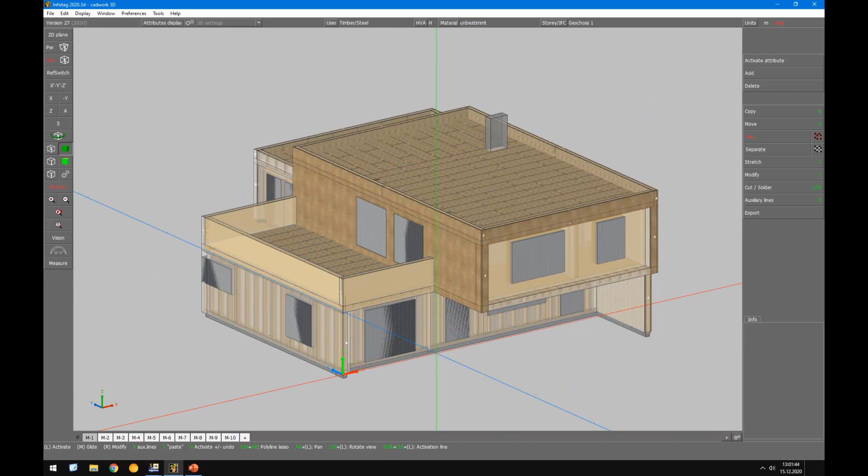We start directly, in this case, in CADWork, and we see the model there. Let's have a look underneath the rendering and we will see how it was solved. You can see here the CLT slab, and here on the left side, of this problem.

Okay, I got some issue with my monitor.

So we have beams and a dowel type connection. We get one component here in the vertical direction via this column, and one component goes in the upper chord to the next tension beam and downwards. So I'm interested only in

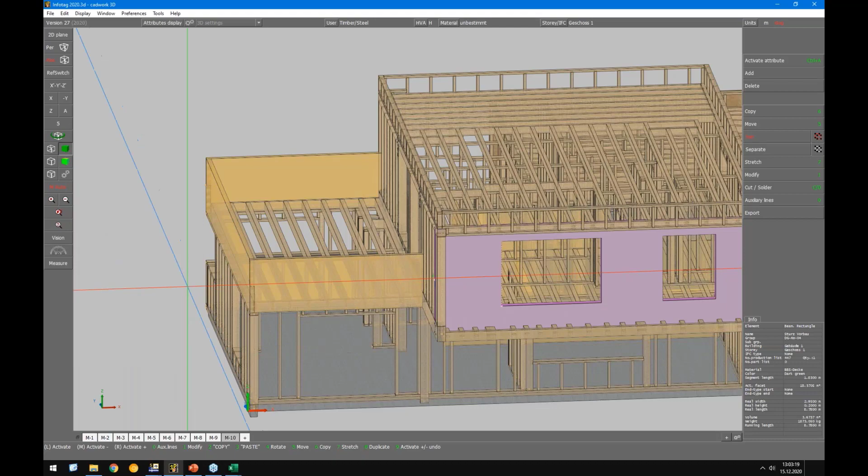I have some issues with my monitor. Wait a minute, please. Andreas, could you confirm, please, if you still see my screen? I can see your CADWork screen. Yeah, okay, perfect. I switched over to the second monitor. There was an issue. Okay, let's see if it works fine. I'm sorry.

The aim now is RFEM, and we can get there by exporting, for example, an IFC file or a DXF file. But there's one smarter solution. In this case, I will look only at this element here, and I'm interested in the center lines, because this is a solid element, and of course I want to design it with a surface element and not with a solid element. So therefore we need the center lines.

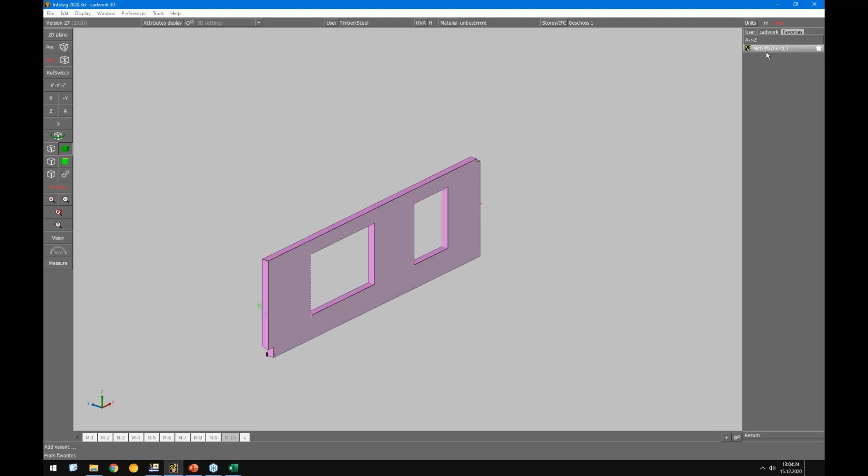Here I can use a variant from CADWork. I was not able to rename it, but it's called center surface for CLT. So I use it and select the element. Then let's go to the wireframe mode, and you can see here the center line or the center surface. This is the one and only element I'm interested in.

So I have the possibility now to export it as a file. In this case, I use the ACIS export format. No, wait a minute, I need to, of course, select all of them. All right, I save it, export, and now I switch over to RFEM.

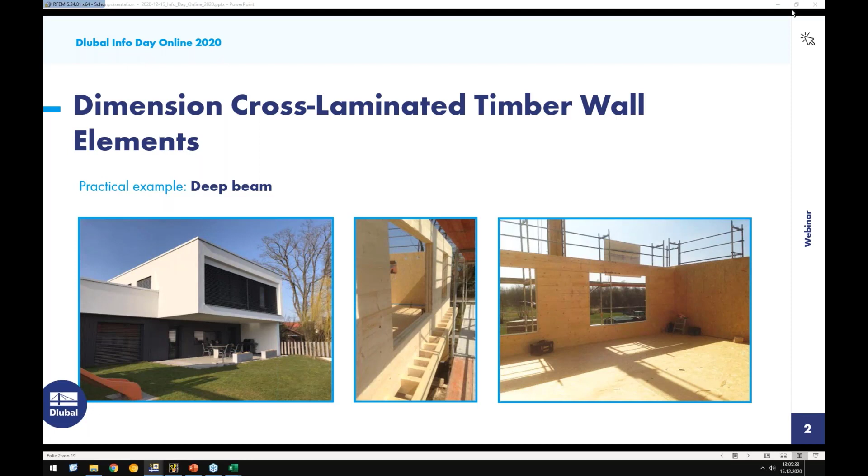Here I'm able to import this SAT file. I select Eurocode 0 plus for the SLS combinations, 1990 plus 1995, and we leave the global Eurocode, but of course you're able to select any other national annexes. We want to create load combinations automatically. I select it and I click OK.

All right, then let's see what we have here. The wall was taken over from CADWork with the openings, and there is a material assigned. It's a softwood material, but it's not important for now. We will come to this later.

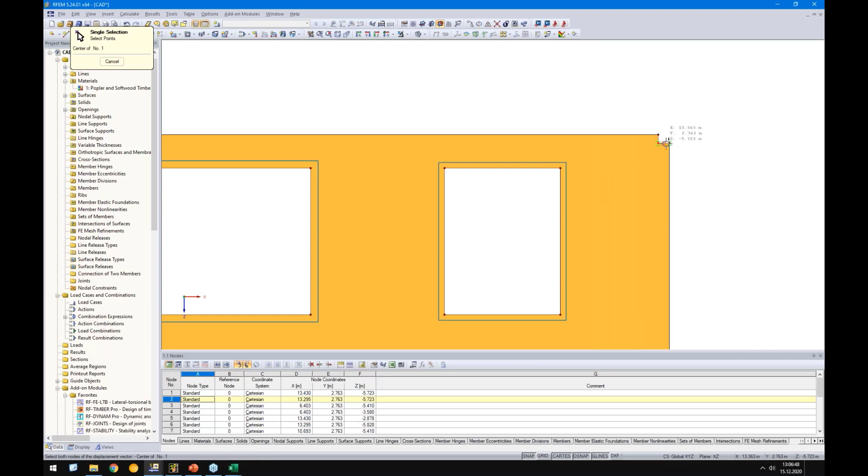We want to clean up the model a bit. For example, I want to ignore this notch here on the upper right side. I will move this node to get a sharp corner. Perfect. And I will do the same here.

We have this tiny step here, or this tiny jump. I want to neglect it, of course. So I grab the Z coordinate of this node and assign this coordinate to all other nodes. At the end, I will merge these nodes. And the same on the left side.

Right side, I mean. All right, so now we can start actually by adding the loads, supports, and so on. But before we do this, let's think about what needs to be checked and what is important. You see here the rendering of this surface, and it's clear when there should be a support, and on the right side should be a support, that the outer layers should be orientated in horizontal direction.

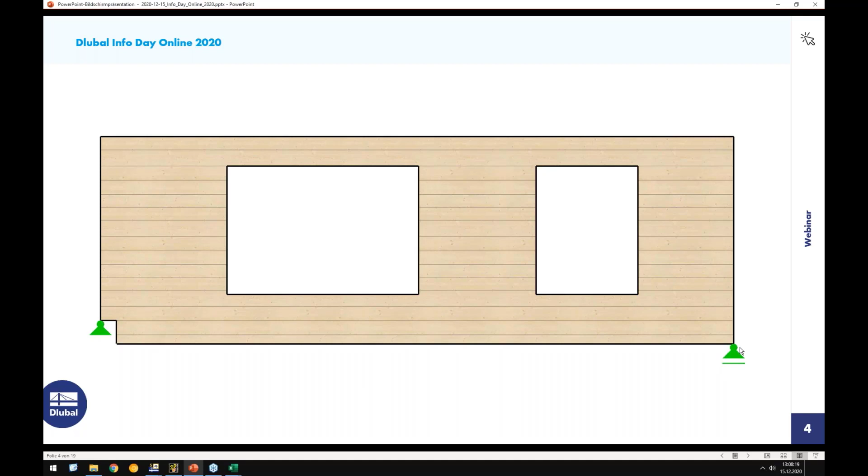That's one important thing, that we need to take care of the orthotropic direction. So the outer layers should be horizontal, and every second intermediate layer should be orientated vertical. Okay, so the next thing is, of course, we need to take care about the supports. In this case, just for demonstration reasons, it's a nodal support. We will not use it afterwards in our design, but for the slide, it is okay.

Okay, we need to take care of the FE mesh. So what size should be used or is suitable? We talk about the stiffness of this CLT element, especially when we check this section here. This one here is a section through the wall. We see here we have the horizontal layers, and we have the transversal layers, which are orientated 90 degrees to the horizontal layers.

And you see it here, this white area. This should be the space between this board and this board, because we do not use any glue at the narrow sides of the boards. So this, of course, has influence on the stiffness, and we need to consider this correctly. Okay, we have a tiny notch here on the bottom. Of course, it will not be controlling since this element is really high in ratio to this small notch.

But you can imagine when you have a CLT element as a beam, and maybe you extend this line here, then you have around 50% of the notch, and then it is much more controlling, and this needs to be checked. I'm just saying that you should consider it. Okay, because of the missing glue at the narrow sides, the shear cannot go directly from one board to the other board. It must go via torsion to the transversal layers, and from the transversal layers back to the horizontal layers. And this torsion, of course, needs to be checked too.

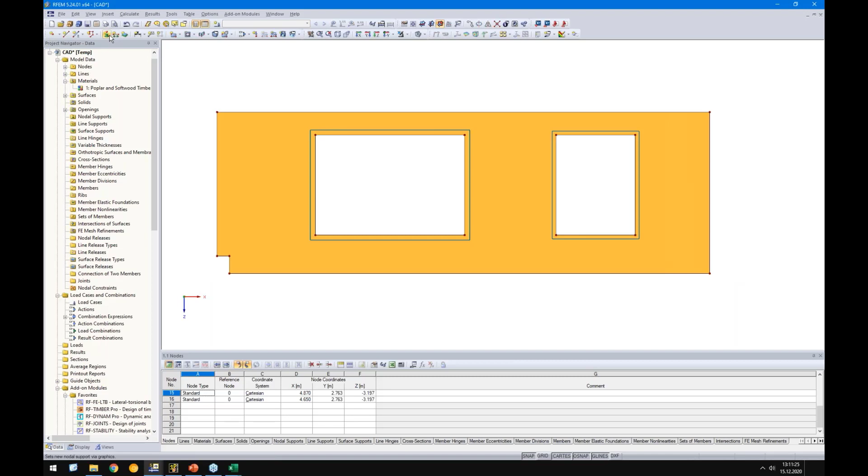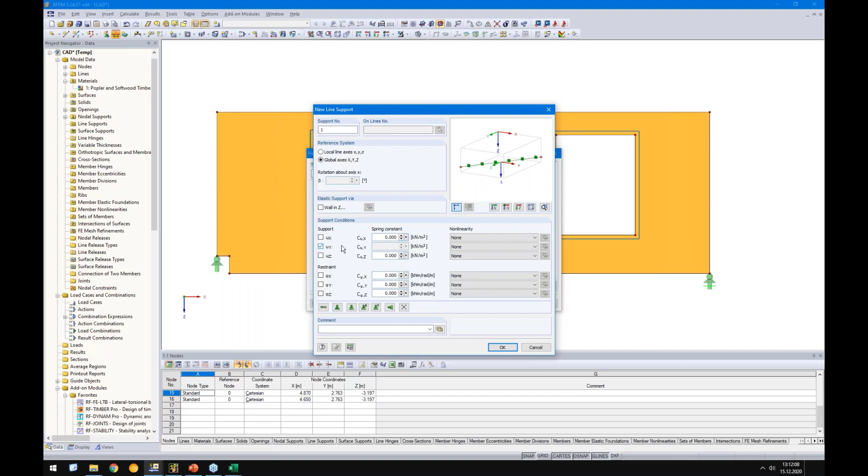So I will start really with nodal supports to see the effects. Okay, so I will support it on the left side. And of course, on the right side, I will use no degree of freedom in X direction. And of course, our wall is supported by the roof beams, the floor beams, and the walls. And in this case, I will directly add line supports. So I support it only in Y direction, means out of plane. So here, here, here, and here.

All right. So then we can start with loading. We create, first of all, load cases. Load case 1 should be self-weight, and we want to consider snow load, and of course, imposed load for the floor. You see here the load duration was assigned automatically, dependent on the action category. And now we start to fill the load cases with loads. For the roof, we have a line load of 5 kilonewton per meter. And for the floor, it is the same, 5 kilonewton per meter.

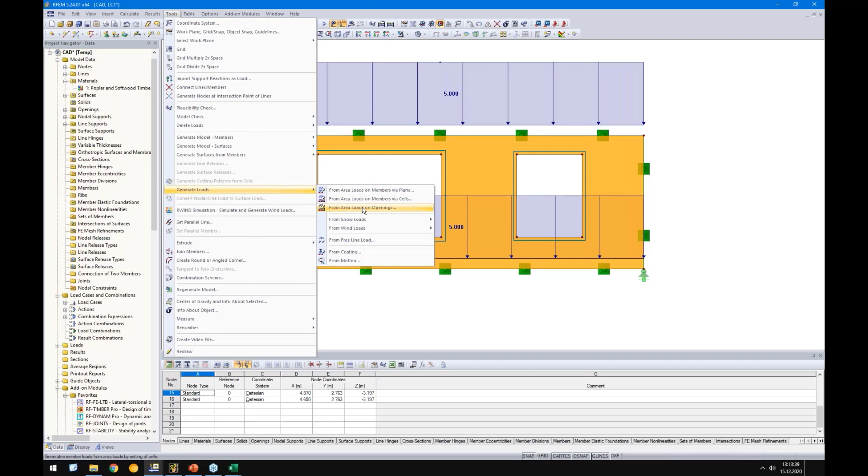Then for the windows, of course, the window has a self-weight as well, which needs to be considered. Which ways do we have to apply loads for openings? There is here under tools, generate loads from area loads on openings. There is an option, but as you can see here, it distributes the load also to all boundary lines. And this is maybe not the way I want to consider it now. I want to say that the whole window weight should act on this bottom line here. So I use a normal line load here.

So when you consider we have a density of 25,000 Newton per cubic meter, and the height of the window is 1.83, and let's say 3 layers with 5 millimeters is 0.015, that equals around 0.7 kilonewton per meter.

Okay, and at the end, we need, of course, to consider the weight for the self weight of all components which will be fixed to the CLT element. And in this case, it acts on the whole surface, of course. So I use a surface load in this case. It should act in Z direction, and the load magnitude can be set here.

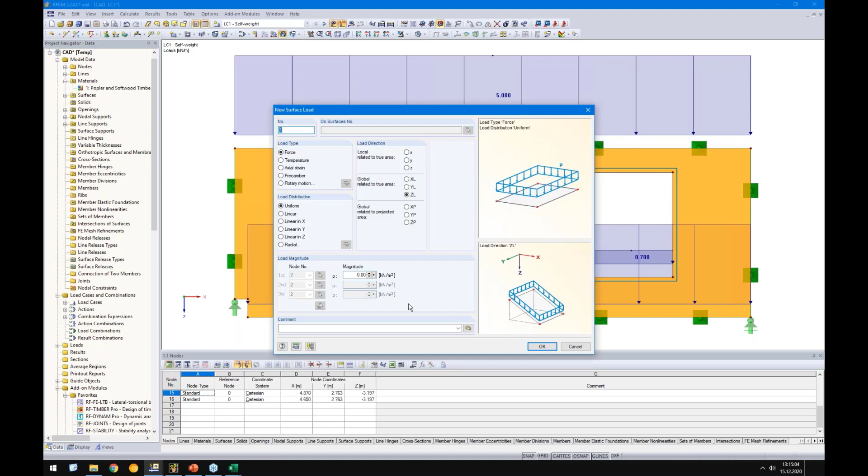In this case, of course, I can calculate it manually and enter the value here, but you can imagine if you do this really often, you waste a lot of time. So better to use here our multi-layer composition. Inside here, I have prepared a few compositions for the wall structure. So in this case, I use this setting here. Let's have a look inside.

So there is an exterior plaster on the outside, wood fiber insulation. Then I have added the CLT. It should become 200 millimeter, and the density is 0 in this case because I consider the self weight of the CLT directly in my load case 1. So it's not necessary to add any value here, or you need to enter a value.

0, I guess it's not allowed, but just enter a small value like 0.0001 to get it directly to the graphic here. Otherwise, you need to delete it, and then you don't have this proper drawing. All right, then let's overtake this value and click OK, and here we go.

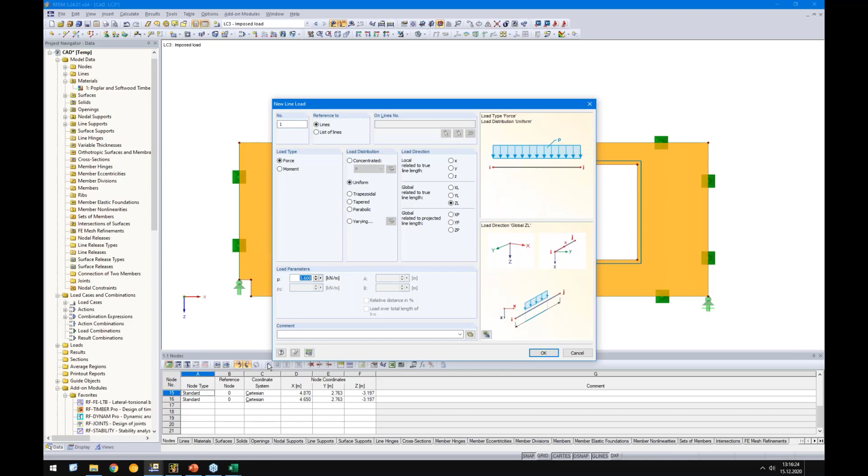So the next load case is snow load. So the snow load is 3.6 kilonewton per meter. And at the end, we have imposed load for the floor, and the floor beams are fixed on the bottom side of the bottom chord with 6.5 kilonewton per meter.

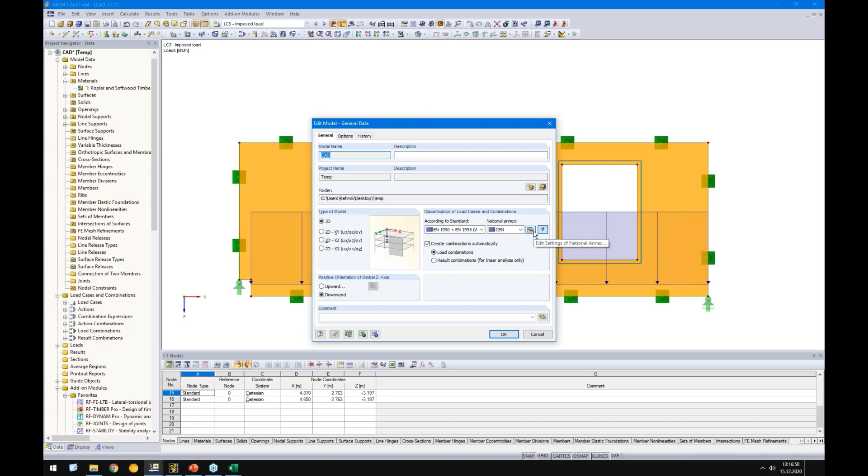All right, so far so good. We have finished loading, and we see directly the load combinations. Maybe you see here the 1.8. This considers the creeping effects. I forgot to switch this here, or to say you can switch the factor, the KDEF factor here at the properties of the national annex, and here on the bottom side you can switch, for example, to 0.6. So when you check it, you see the factor is considered in the load combinations for the quasi-permanent loading.

All right, so then actually we can start with the analysis, and before we do this, let's check our FE mesh. So I just create the FE mesh and see what is the result. And as you can see, okay, the FE mesh is absolutely bad and needs to be optimized. So you see here it's the default setting of 0.5 meters, what we use in the background. But what FE mesh size should I use in this case?

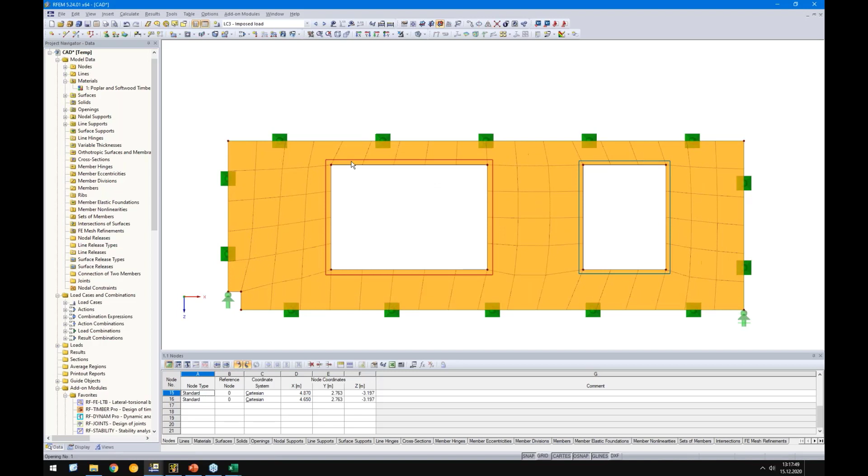So the weakest area is here, the upper chord, and I would say you should have at least 3 to 4 elements over the height here of the upper chord. And with the background that the producer does not put any glue on the narrow sides, and even if they put glue on the narrow sides, I do not recommend it as a rigid connection because of humidity effects and so on. So because of this, and we check this distortion design, what I mentioned in the presentation, the FE mesh size should be the same width as the board width.

So when you think about the ratio board width to board height around 4 to 1 or 3 to 1, then with the board thickness of 40 millimeters, what is used in this example, and use 3 to 1, we get 120 millimeter board width. So I will use here, let's start with 0.1 meters and regenerate FE mesh, and we will see, okay, we got 4 elements, we have these small triangle elements here and here. Yeah, for membrane forces, that's fine, but for bending, they could deliver some bad results.

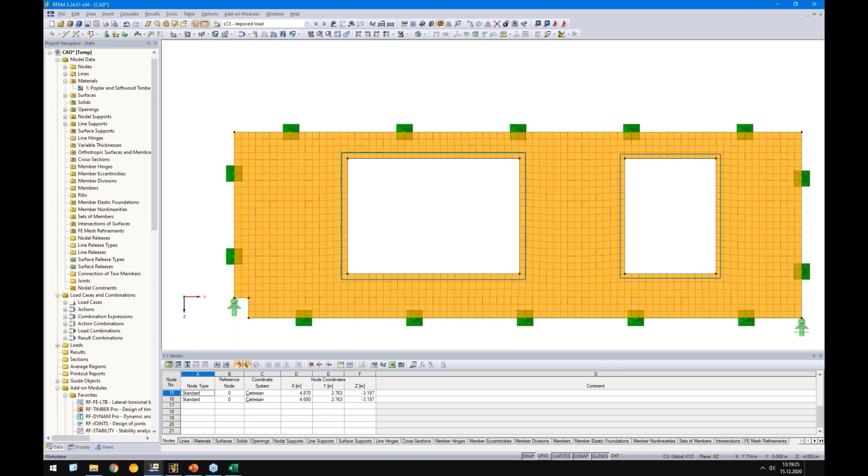So maybe I will increase it a bit and see what's going on here. Yeah, 0.11. Yeah, looks good so far. So we use this FE mesh size for the analysis. Okay, then just try to run the analysis, and then you will see we get an error message because of Poisson ratio. And yeah, when we see this, this is just a poplar softwood timber with an isotropic linear material model.

Of course, we can change it here to isotropic elastic 2D, but in this case, that's something special with CLT, because for CLT, we have our add-on module called RF-LAMINATE. Okay, and inside the RF-LAMINATE, we define the composition. And after we define the composition, before we run the analysis, the stiffness gets exported to RFEM, and then the internal forces are calculated based on the stiffness that we exported. Okay, I want to design surface number 1 according to Eurocode for CO1 through CO5.

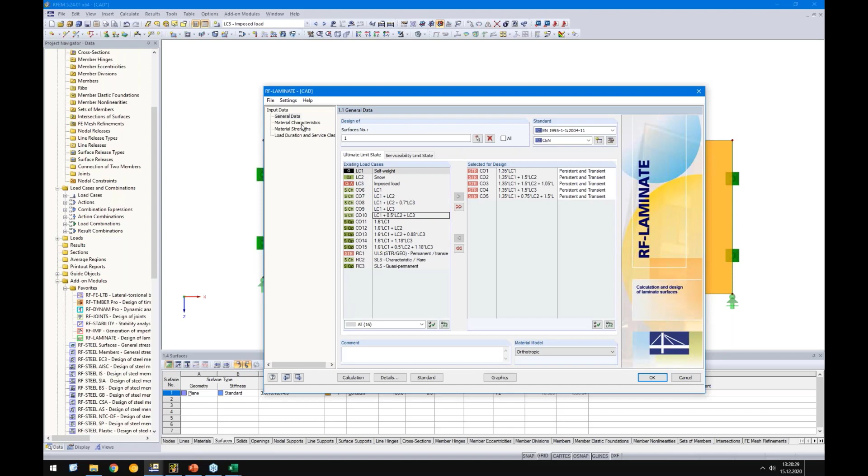So material characteristic, here we go with defining the composition. So we have to select the surface, it's surface 1, and here we can, for example, import compositions from different producers. Yeah, that's one way, and the common way actually, to not favor any producer, I created it manually. In this case, this is what you can do too. So I'll load the material from our material library.

So it's softwood, and I choose a C24 in this case, and you see here all settings are filled. And in this case, I select here cross-laminated timber. And let's see what's going on here. We have the thickness, 40 millimeter is fine in this example. The values for EX and EY are loaded, and for shear modulus and so on. Here for the second layer, I hit the F8 button. It overtakes the entry from the first column.

Okay, so in this case, the orthotropic direction is 0. So you see here this coordinate system. The red arrow is the x-axis, and the green one is the y-axis. So if I rotate the second layer, for example, you will see the red arrow goes downwards, and this is the transversal layers, so the second one. Okay, and the same for the fourth layer. Okay, then let's go to the next tab.

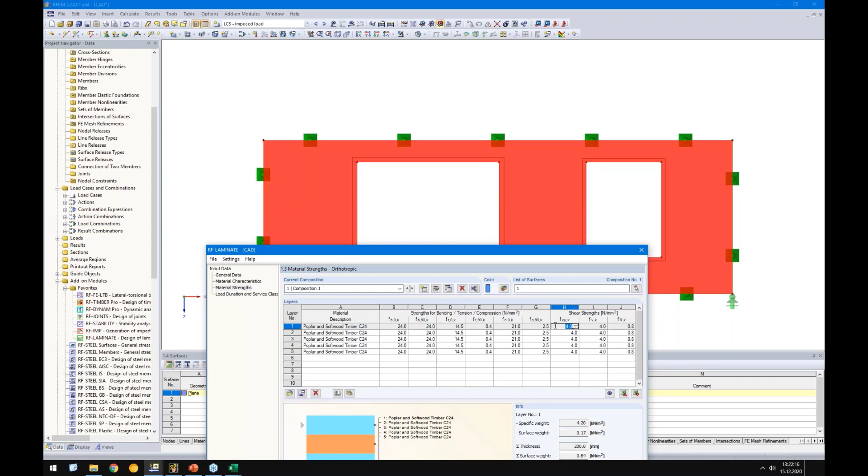It's the material strengths. And here we simply modify the shear strength a bit because we do not consider any k-crack for surface design, and therefore I will modify it a bit and set it for all layers. Okay, the last tab is about the load duration class, but it was assigned automatically to the load cases, and therefore we always use the shortest load duration as the code offers. Here are a few settings about the service class, but this is fine for us.

Okay, let's go back to the composition, and let's check the stiffness matrix. So we have the stiffness matrix elements for bending, for shear, and for membrane. And in this case, I do not consider any wind, since the wind was really weak in this example, and it is not controlling. It's much easier in this case to consider and envelope the results. So therefore, in our case, only the stiffness matrix elements for membrane, meaning D66 through D88, are necessary.

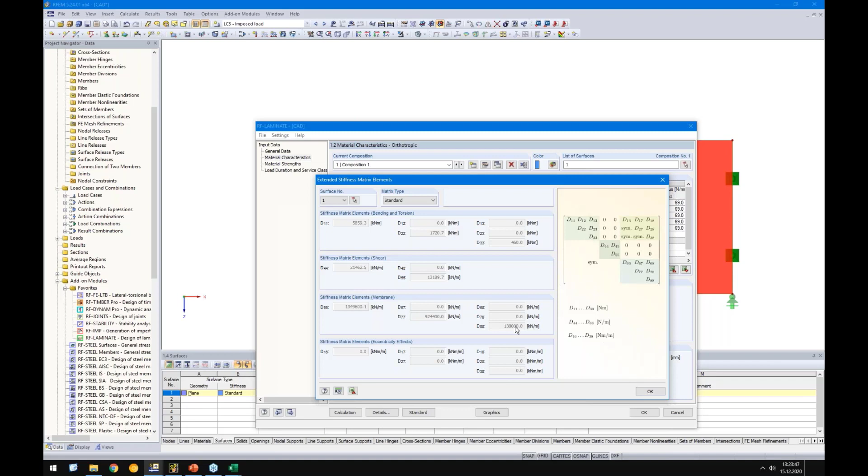Okay, but the only problem we have now, we did not load it from the producer library. Therefore, we have a bit too much shear stiffness inside the plane, because how should the program know about the glue on the narrow sides? And this is what I want to show you about this issue. Okay.

All right, so here I have prepared a small example, and these are solid elements. In the upper one, I have glue on the narrow side, so it means there is a rigid connection between the solids. And on the bottom side, you see I have modeled a small gap in between each board from this direction, and also in the other direction here on the upper side.

And here you see the results. So this is the result from the solid, and this is the result from the surface and RF-LAMINATE. You see the result is the same. And of course, if there is no glue on the narrow sides, the deformation gets bigger, and this effect needs to be considered also here in RF-LAMINATE. What you need to do is consider the ratio from this solid element to this solid element. And then you get a factor and you know how to reduce the stiffness.

Of course, this is really time consuming, and nobody wants to do this. Fortunately, there is an approach already, and it's based on the Austrian National Annex. So here you see this Excel sheet. You can download it afterwards on our homepage. You see here a small table, and you need to enter just the thickness of the slab, the amount of layers and the board width, and you get a reduction factor of 0.59.

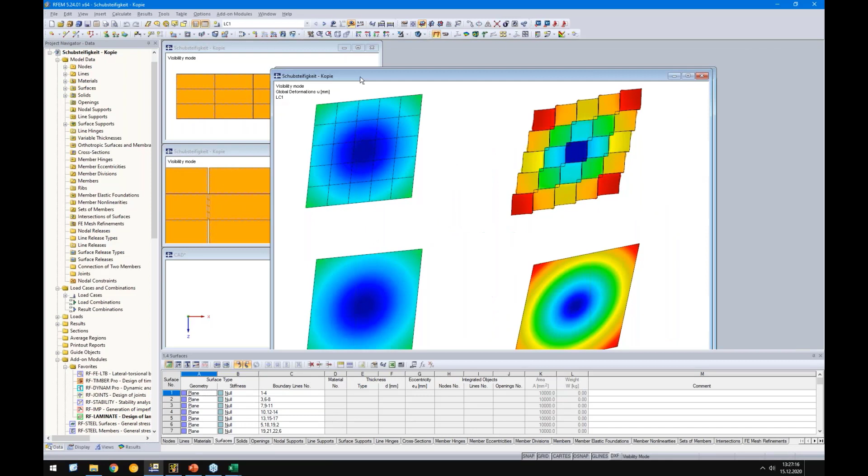And when you enter this value here in the details of the composition, as you can see here, you get exactly the same deformation as the solid elements have. So this needs to be done in case the producer does not provide us any values, but normally they do, and therefore you don't have to waste time on this. All right, so let's go back.

And for our example, we need to figure out these factors. So I'll open the Excel sheet. In this case, we had 200 millimeters, 5 layers, and 120 millimeter board width. So we have a reduction factor for the torsional stiffness of 0.5, and for the in-plane shear stiffness of 0.6. And these values we take over now. So it's 0.5 and 0.6.

I use it also for the torsional element, since we do an eigenvalue analysis afterwards, and there the torsional stiffness is important too. Okay, here I say I have no glue at the narrow sides. You see there is an E modulus in Y direction considered. We will check what happens afterwards, and we have 120 millimeter board width. That's because of this torsion design.

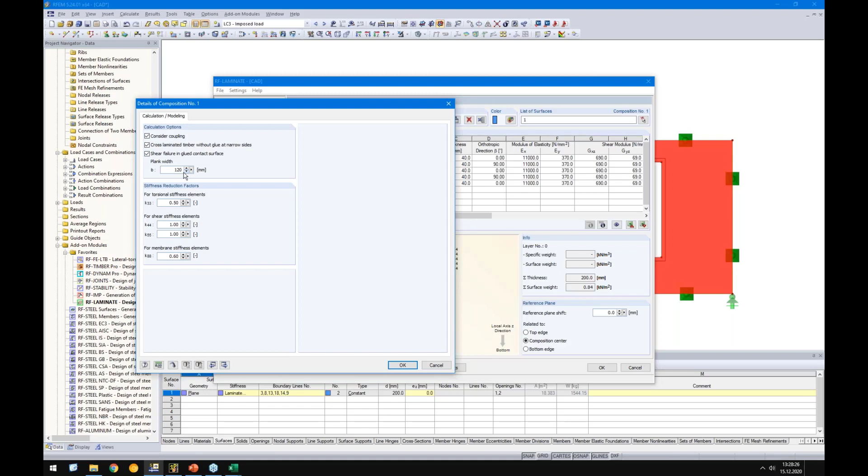As you can see here now, the E modulus in Y direction of each layer, so not of the whole composition, only of each layer, is set to 0. All right, and then let's start the analysis. Okay, so this is the result. The first time really confusing, but let's see what we can do.

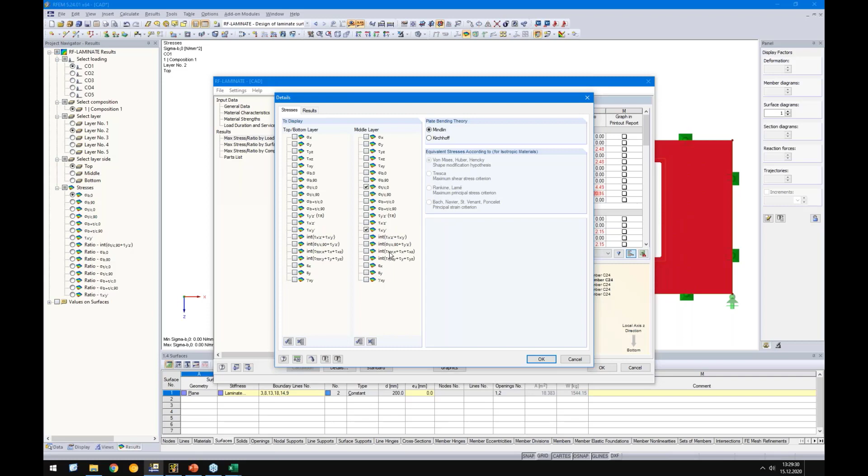So in this example, in this tab here, you can select which designs you want to see. In this case, we have only membrane forces, so the stresses are constant over the thickness, and therefore I'm interested only in the results from the middle layers. And of course, I'm only interested in our normal stress and in our in-plane shear stress. That's XY, referring to the local axis system. Afterwards we activate the torsion design, but for now it should be fine.

Okay, then we come to a ratio of 5 point something. Okay, let's see where it happens. You see this black arrow here. Of course, it's exactly at the location where the singularity is, and where the nodal support is. Everyone who dealt already with FEM knows that's a typical singularity, and we cannot evaluate these results.

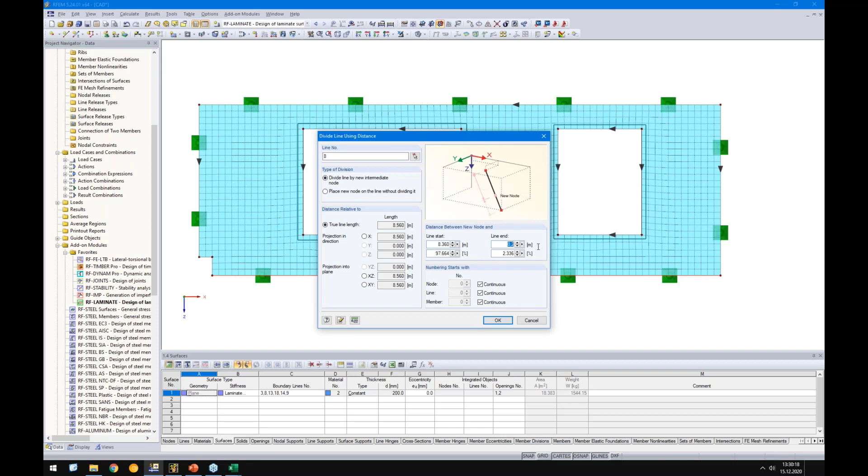Okay, so what can we do in this case? Of course, we can do the same as we do for loads. We distribute it to line loads or area loads. So in this case, I will distribute it to a line load. No, wait a minute, it was the start. Support width is here 20 centimeters.

Okay, so let's start here with the line support, and of course we should release it in X direction, and I create only one support, and it should be, of course, supported in X direction. Therefore, I enter a tiny spring here in X direction. Otherwise, the structure would move to infinity. All right, then let's go back to RF-LAMINATE again and check what happens.

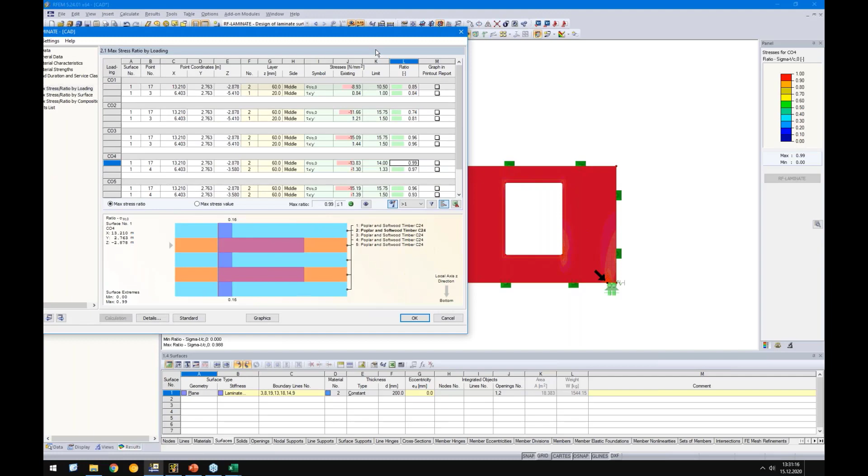So we had a ratio of 5 point something, and because of the line supports, we came down to 0.99. When we check the maximum ratio again, it comes from CO4. I will remove all other COs for future analysis, because CO4 in this case is design-governing, and I will check only CO4. It saves me a bit of time. Okay, so we have 0.99, and when we check it, it's not in the corner, but it's here.

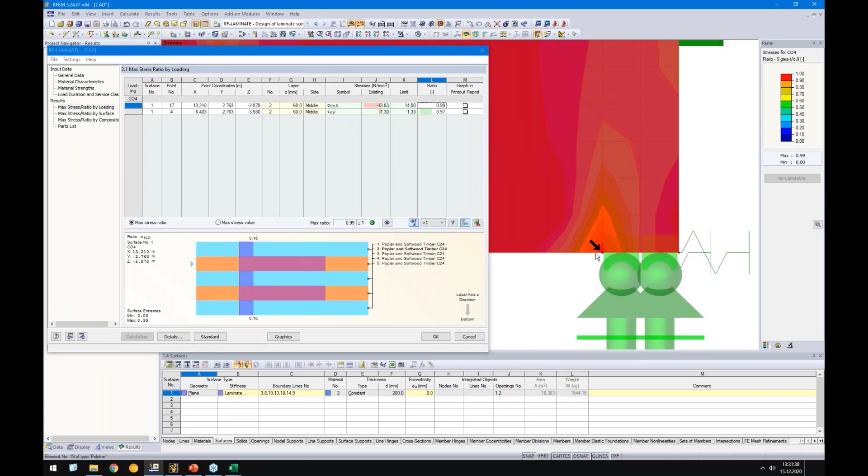So we have no stiffness here on this line, but then we have a really stiff or rigid support, and of course we get another singularity here. In case we use this approach, we have to consider our support reactions. So I will check our support reactions, and we can see here, maybe we need to refine the mesh a bit, but you can see also tension forces are covered by the support. Of course, this should not happen in our example or in general in timber.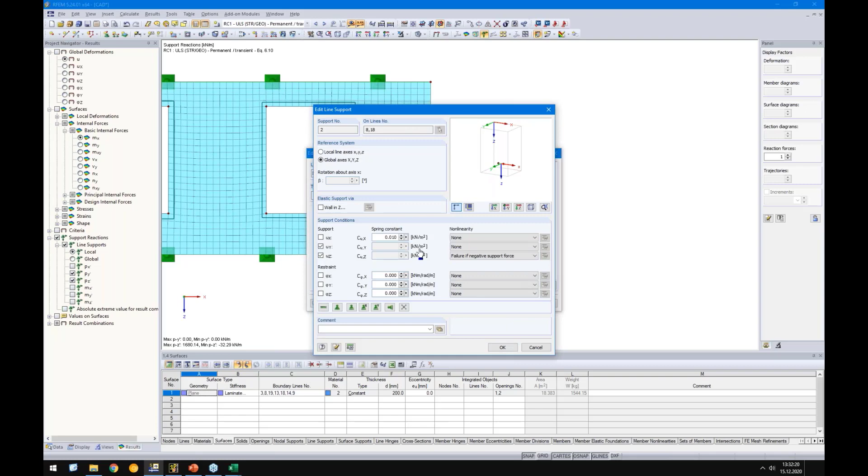Therefore, I add here a nonlinearity, which says, please fail if there is a negative support force. So in case of tension, the support should fail. Okay, then let's check it again, just to avoid any restraint here in this corner. Okay, then we are fine, perfect. Okay, let's go back to CADWork and see.

Let's see here. The support condition here on the left side is still considered as a rigid support. Maybe that's true here for the right side, but of course not for this side. How can we represent this support in our 2D analysis?

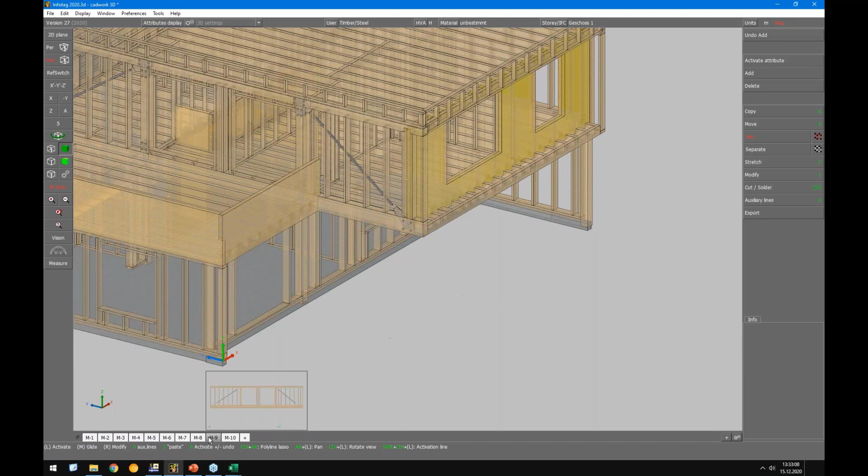I have prepared a scene in CADWork, so these are my elements of interest. In this case, I can simply say, please export a model structural system. This is what I want to do. Okay, there's something about the connection. I want to save it, let's say, on the desktop. I want to save this submodel DSTV file on my desktop.

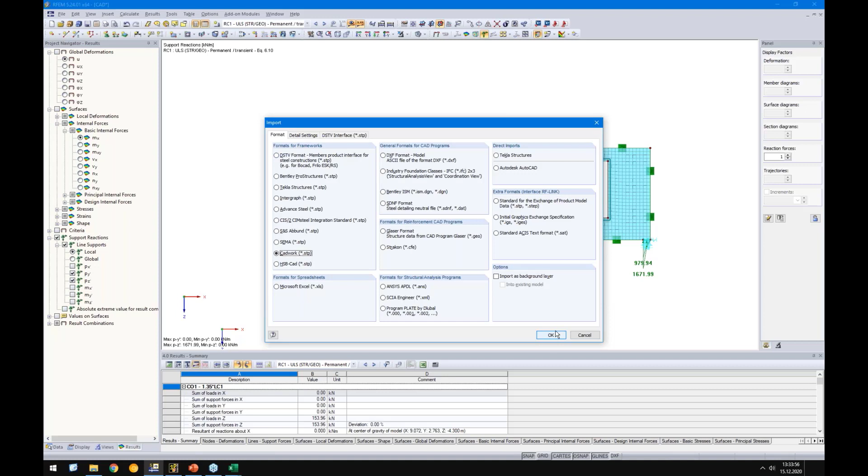And now I can import it here on the left side, CADWork STP file. It's an STP file based on this interface for steel constructions, but it works also for timber. Okay, so, oops, here we go. We don't need any load combinations, and we can simply import this file. Okay, looks good so far.

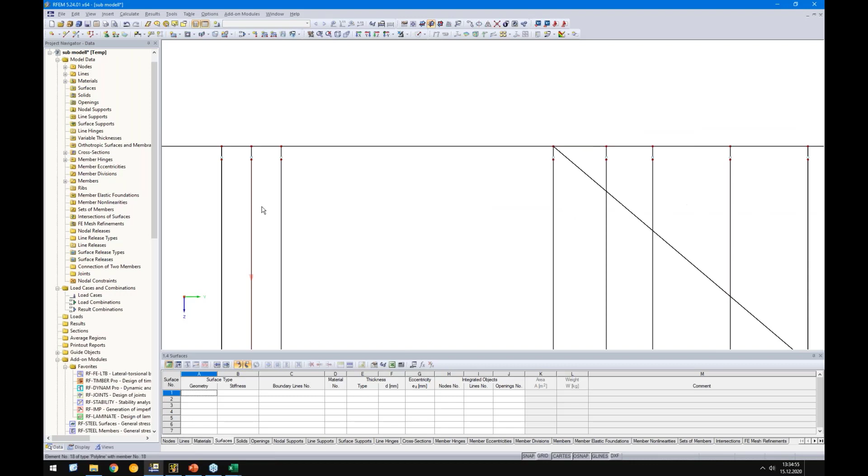So we have the member elements included in RFEM, and let's see the wireframe model. You see, there are still a few issues. We can fix it quickly here. You see here, members are not connected, or members are too long, and so on. That's because of the half width of this beam element. Okay, so this one we will fix via drag and drop directly, and the same on the right side, and here on the left side.

Okay, then we quickly support it. We need to support it in Y direction, otherwise the beam would rotate around its own axis. And there is another support underneath this column. So I will add another one, which is sliding in Y direction, here and here. And the top chord, of course, must be supported, otherwise it will fall down or the beam will rotate around its own axis.

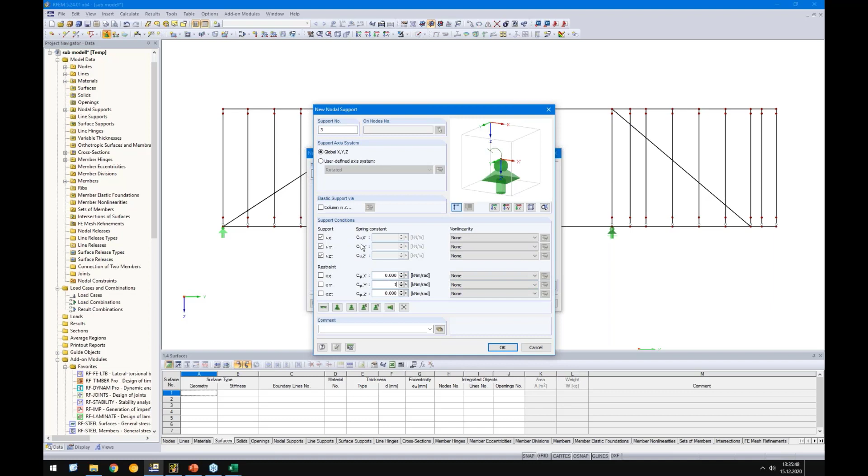Okay, so in this case, I need to restrain it around the Y-axis, for example, with a spring. And here I want to support it in X direction. For simplification, I just select it for all nodes, but I'm only interested in the vertical deformation. And you see here, the vertical deformation is sliding, which is fine.

Okay, and what is my aim now actually? The aim is I want to add a unit load here. Based on this unit load, I get a deformation. And based on this deformation, I can calculate my equivalent spring. So I create a unit load of 1 kilonewton. I deactivate the self-weight in this case. 1 kilonewton. And let's see the deformation in Z direction.

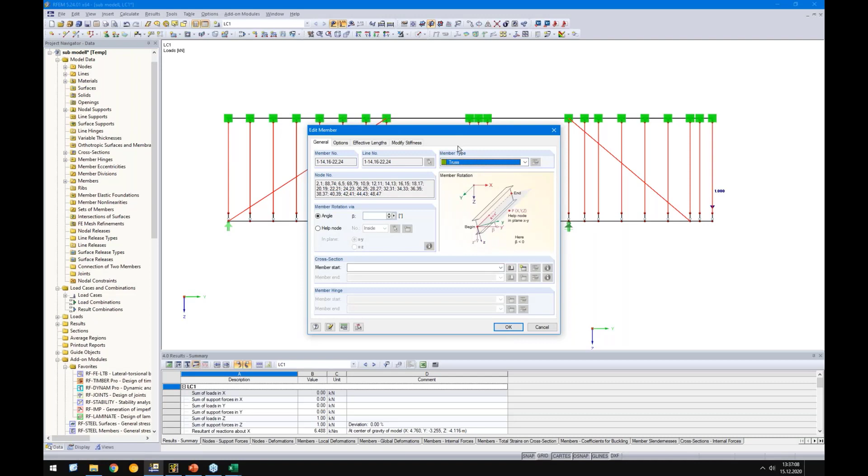Okay, I forgot to mention, here we have some hinges and we have here some beams. Maybe I explain it in a better way. In this case, I directly replace these beams by truss elements, with a hinge connection on member start and member end. And here these coupling members, which consider the eccentricity. The hinges come directly from CADWork, but I don't want to consider them. Therefore, I will delete them.

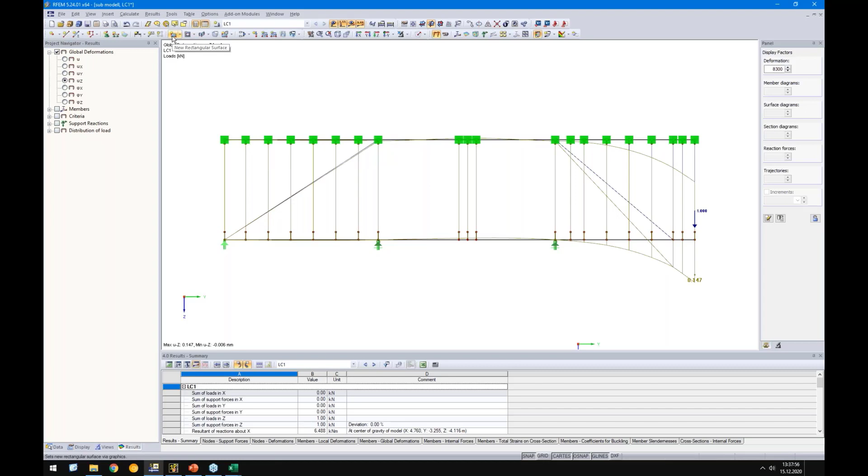Okay. And of course, you can discuss if this is a truss beam or if it's better to use a tension beam. But in this example, we get only tension forces, therefore it does not matter. Okay, we get a deformation of 0.147 millimeter. And of course, we can use the spring now. But we know there is an OSB sheet on these beam elements. So we can add this OSB sheet too to have more stiffness. This is what I will do now.

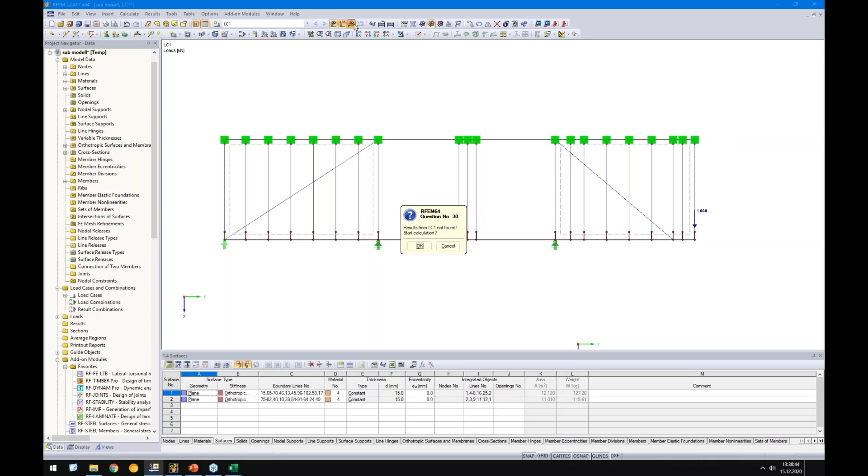Okay. Then let's run the analysis. We get an error. This error is because of these truss beams. You see here, there is no node, there's no connection to the beam, which is fine. But of course, there should be no connection to the surface as well. In this case, the easiest way is to say to the surface, please do not integrate this line, and then the member is not integrated automatically either. I will do the same on the right side.

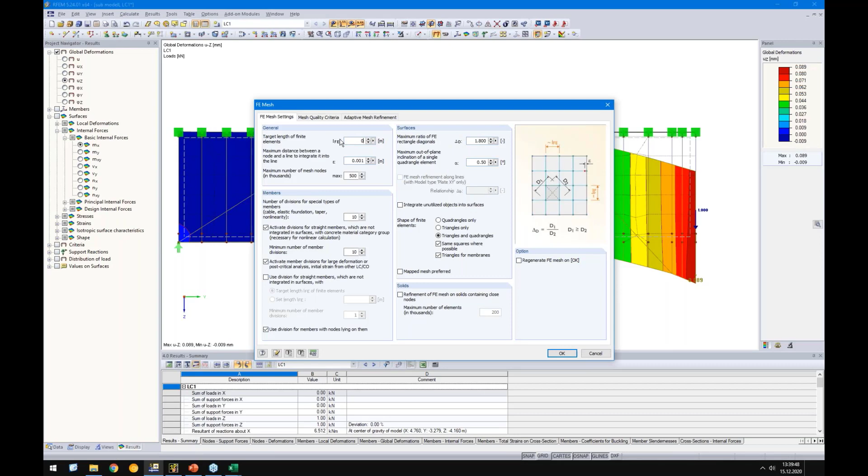Okay, and in this example, of course, the OSB sheet is connected rigidly to the beam elements. Of course, that's not the truth, because each timber element is connected to other timber elements with an elastic spring, for example. And this is what I want to consider too. So for this case, I will select only 2 surfaces and all integrated objects.

Okay, and now I want to release the surface from the beam elements, and this I can do with these line releases. So new graphically, and here I define a spring. I want to say here the axis system should be according to the z-axis coordinate system. So in this case, I can consider x and y degree of freedom.

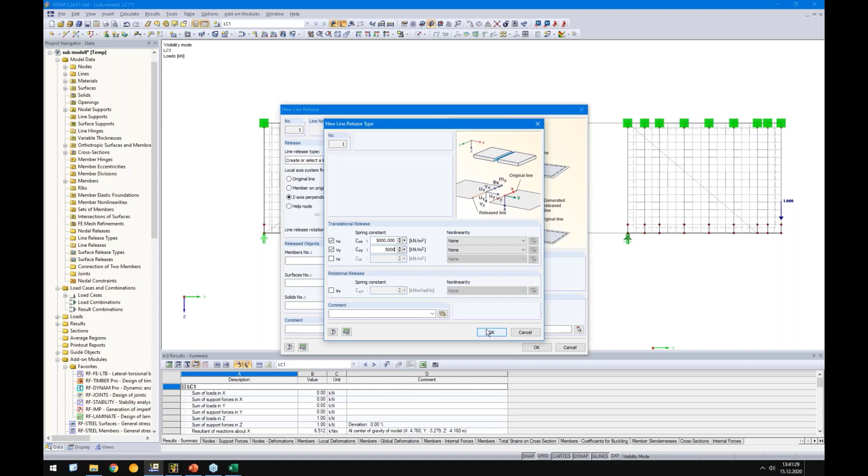So the spring constant, of course, depends on the fastener. In this case, some staples. The value for one staple is around 500 Newton per millimeter, and when you use 10 staples per meter, you get 5,000. So 500 by 10 staples per meter. The same here. Okay, in both directions, and here I release surface number 1.

Surface number 1, and perfect. I select all these lines, and I do the same on the right side. So this is surface number 2, and now we should get a deformation which is between the 0.09 and 0.14. In this case it's 0.10.

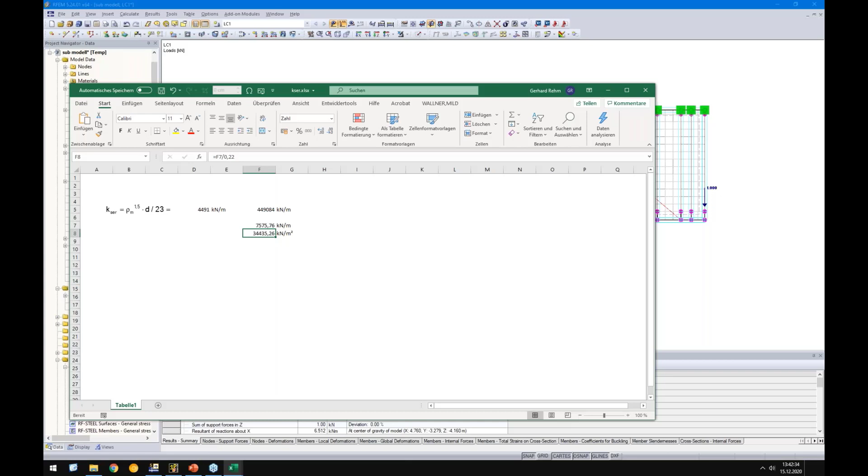And finally we will add another semi-rigid connection, of course, because of this tension beam connection with these dowel type fasteners. So in this case, I select these beams and I say, okay, please use a beam element, and I want to define some member end hinges. Okay, so I have prepared an Excel sheet where we can simply calculate this spring. For example, this is the result for dowels from Eurocode 5, table 7.1.

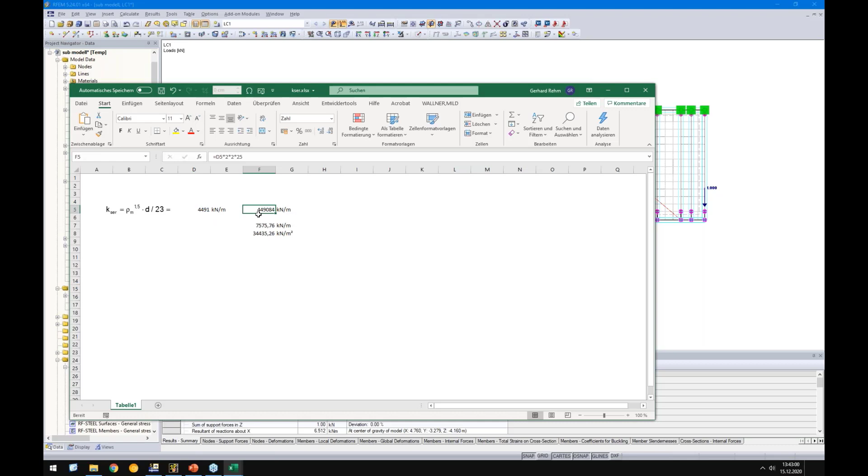So for one dowel type fastener with 12 millimeters, we get a spring of around 4,500 kilonewton per meter. And this value can be multiplied by 2 because of the steel-wood connection. And we have 2 shear planes and 25 fasteners. So we get a spring of 450,000 kilonewton per meter, which is really rigid. So in this case, it should be in Y and Z direction. So 450,000. And here, we can consider just a tiny spring to keep it stable. And of course, on both sides.

So we had 0.10 millimeter, and now it should become a bit higher, a bit more deformation. So 0.132 millimeters. Let's get back to our Excel file. And here, I divided the 1 kilonewton by the 0.132 millimeters, and I get this equivalent spring for the whole support. And here I distribute this spring along the line length. It's 22 centimeters, and I get this spring, 35,000 kilonewton per meter.

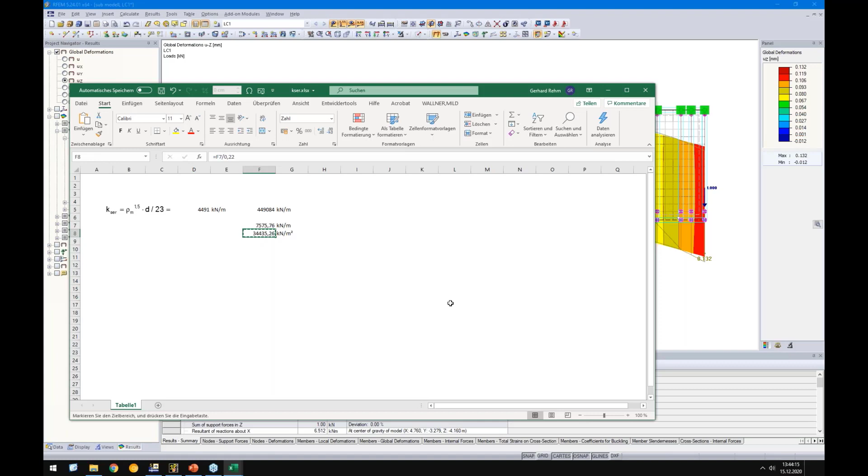Okay, and this spring I will enter in my main model. All right, I will change it here. So in Z direction, I want to consider this value. Perfect. Of course, here on the right side, it's different because here we have a column underneath with 22 by 22 centimeters, and it's, I guess, 3 meters high.

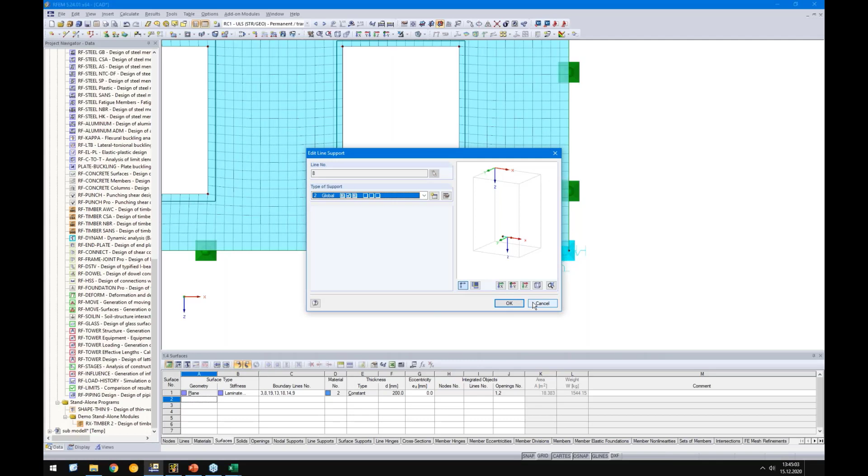So in this case, we can calculate an equivalent spring too, and in this case, the program makes it easy. We can use this function wall in Z direction. So the width was 220 millimeters, the height was 3 meters. Material, in this case timber, has different E-modulus in different directions. Therefore, until now, the timber material is not supported by this function, but we simply use a concrete material, a lightweight concrete in this example, which has the same E-modulus as the timber has.

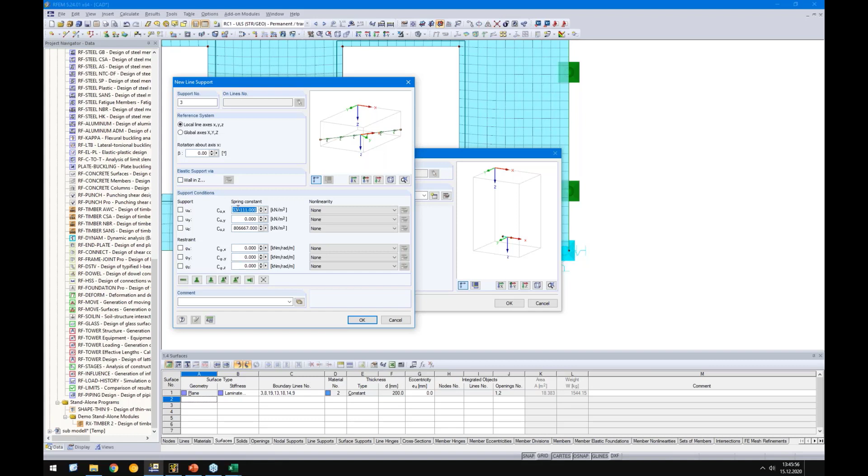Okay, and it should be hinged, and I get here my equivalent spring. Okay, so in this case, it will not work because I don't want to consider, of course, the spring in X direction. Therefore, I will deactivate it and I will replace it again by 0.01. Okay, that's it so far. And let's add maybe here this nonlinearity.

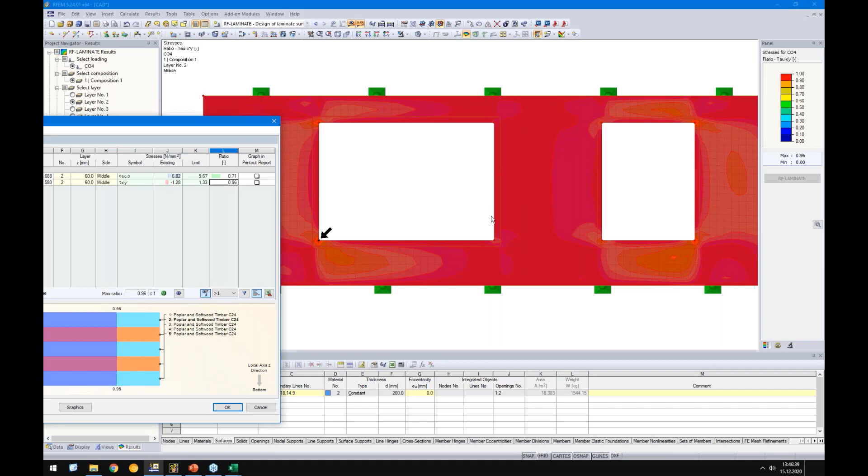Okay, and let's get back to the RF-LAMINATE module. And finally, let's check the results. Okay, we came down to 0.96, but when we check it, it's not here on the bottom right corner, it's here in the windows, because of course we have some singularity here because of the corners. Okay, but so far it's good.

So now we need to evaluate the results. And for the surface design, we need to go away from thinking about member design where we have a clear ratio. Because of the singularity, I recommend you the following procedure. So it makes no sense to check here the smiley if it's red or green. You need to evaluate it at once.

In this case, let's start here. So we have, for example, layer number 1. Of course, we have only one layer side for the results because the results are constant. We have no plate stress and no load out of plane. So therefore, it makes it easy.

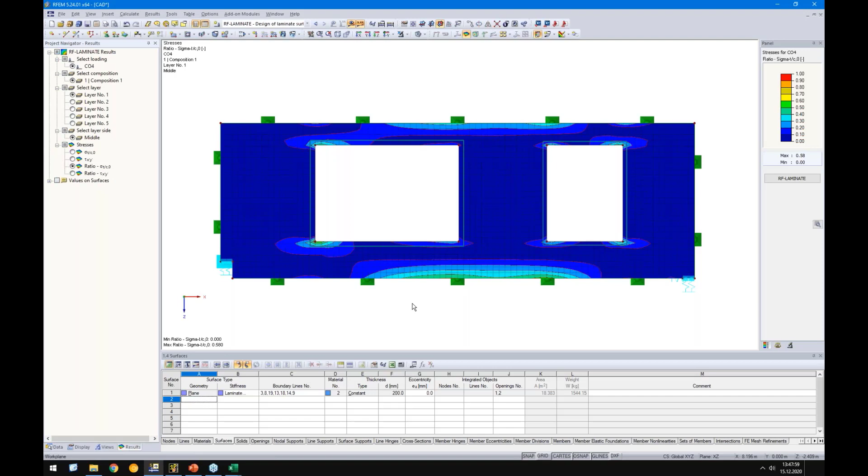Okay, let's check the stresses in this case. So this is the typical normal stress. So here there is tension and here compression on this chord and the same on the upper chord. And we can see directly the ratio. So the ratio here is around 0.6. So even if there are singularities, I would say for this ratio, this is okay, this is fine.

For shear, let's check the shear force or the shear stress. Of course, the shear stress is really high here in this region and this region, which makes sense; there it is less high than here or here. And let's check the ratio. We know the ratio is really close to 1. But the question is only in which areas. And this is exactly what you should consider: which areas are affected.

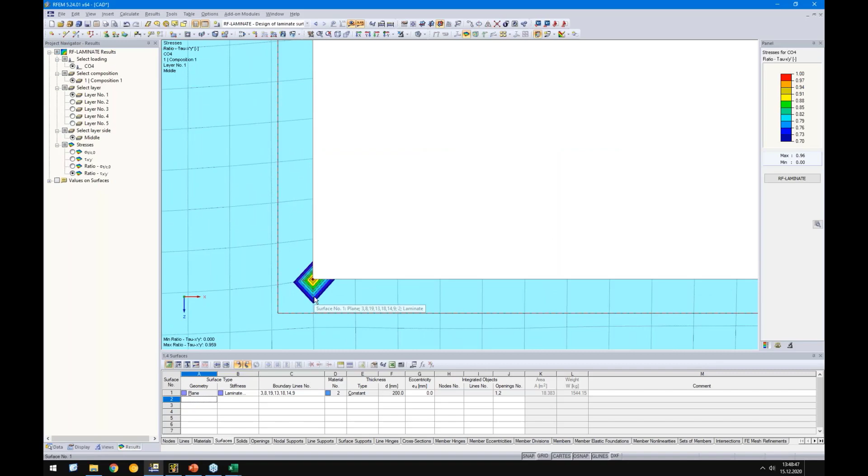And in this case, I recommend: please show me all ratios which are higher than 70%. And then you will see there is actually nearly none, only here, because it's clear, it's a singularity. You see the stresses become really large within one FE element. So here we exceed the 70% ratio. Only these corners have a higher ratio, but we cannot evaluate it.

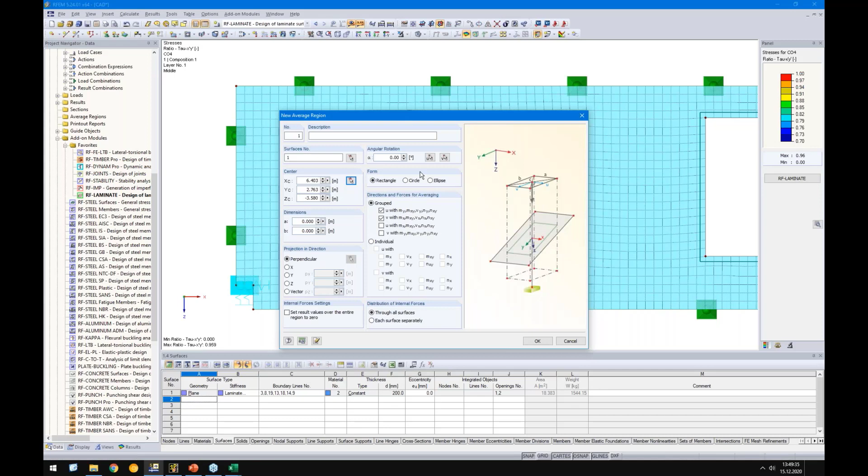There are a few possibilities how you can get rid of the singularities. I don't want to show it in detail now because we have shown this so often in our webinars. The easiest and a good way is to use these average regions. So you can create a new average region for surface 1. The center, for example, should be here, and it should be a circle with 0.3 meters. When I click OK, let's check the results for CO4.

In this case, I want to check the shear, for example. And you can see here, when I deactivate the average region, this is the result which comes from there. And when I activate the average region, you see the result is distributed along the width of this average region. Of course, it's better to add a mesh refinement to get a finer mesh around these nodes.

So this is one option, but I don't want to go into detail for this example or for these average regions, because there is so much information on our website about this, and you also find it in our other webinars, how we deal with these average regions.

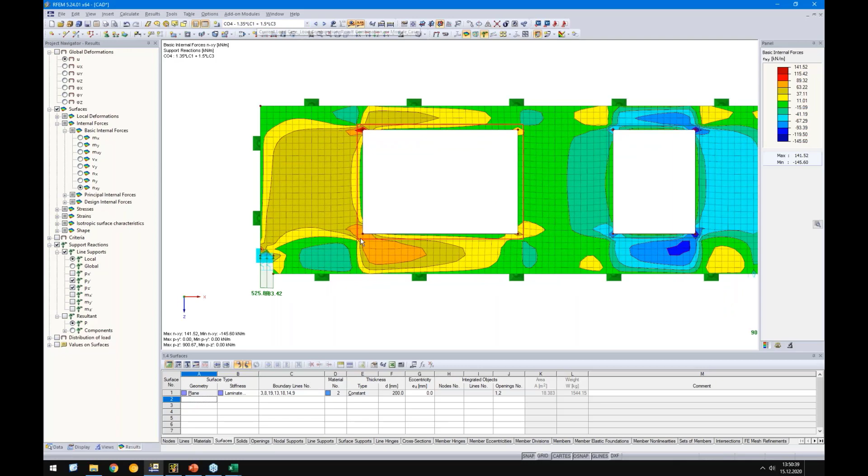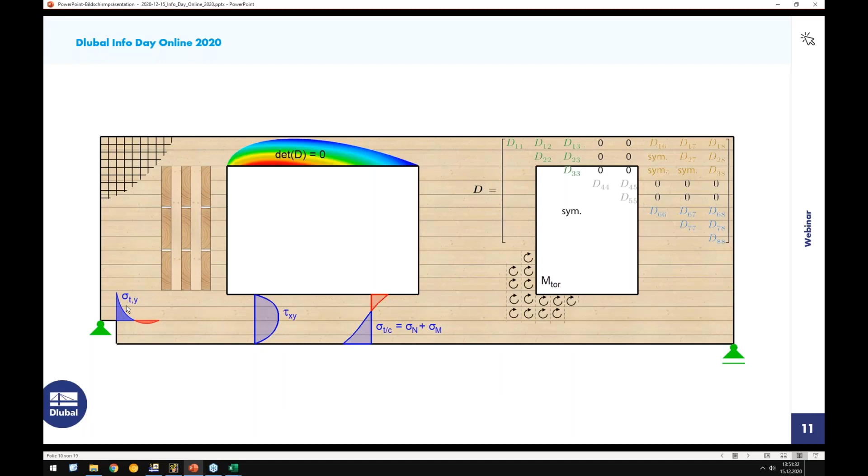So in this case, I used NY. Maybe better to use a finer FE mesh here, and then you get this typical transversal tension curve, which is shown here. And I don't want to go into detail for this example because RF-LAMINATE is evaluating this automatically, because we have our stresses.

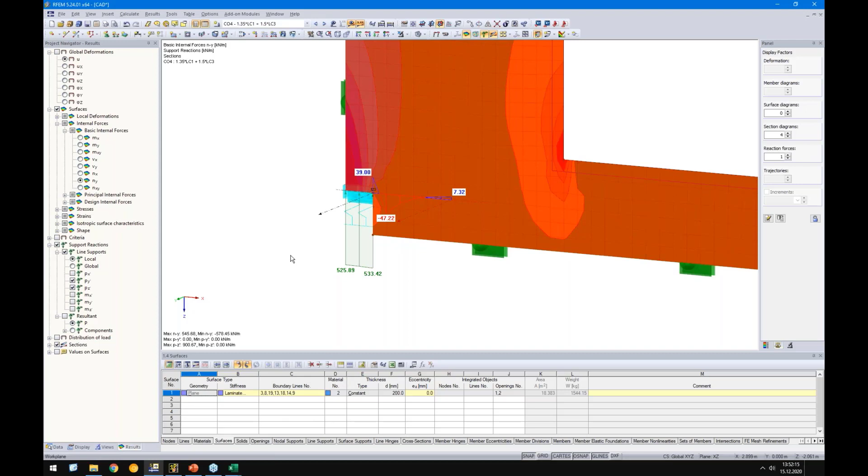Sorry, I need to switch. When we check our normal force inside here, in Y direction. The Y direction, as you can see here, goes perpendicular to the horizontal layers. So this can be evaluated manually with this section, for example, or you can simply let the RF-LAMINATE module do the job, which is doing this automatically.

So then let's go back to the RF-LAMINATE module again, run the analysis again, and see the results again. This is actually really simple because we have only membrane forces. You can imagine if you have plate bending and normal forces and so on, a lot more design checks must be done, but in this case it's really easy.

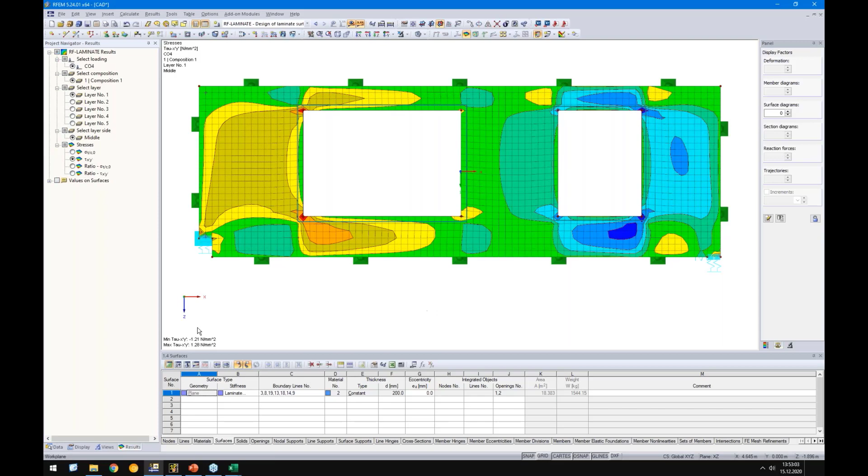So we have only our normal stress, our shear stress, and the corresponding ratio. Of course, I did not activate it. We need to activate this torsion design because of the missing glue on the narrow side. So this is what I want to do now. I will activate it, and here you see the design is not fulfilled, but please think about the ratio and where the ratio is.

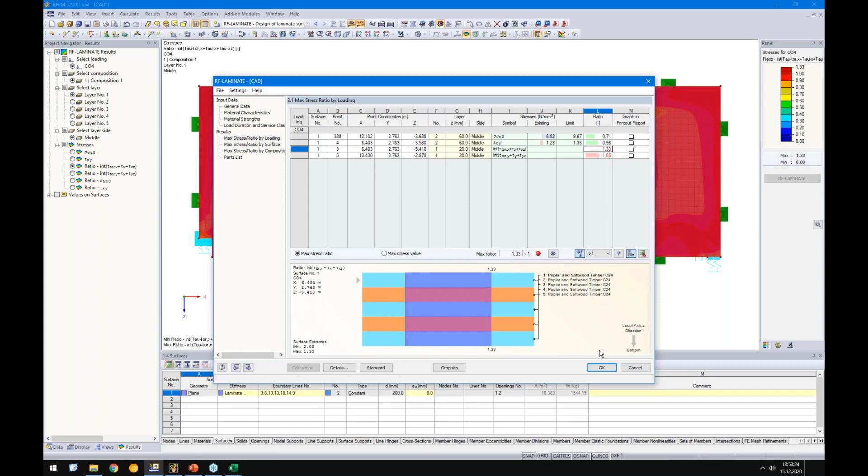So we go to OK and see, okay, maximum is 1.33, but as you can see, it's here at these spots. So for this example, I would say I would not define any average regions, because you can argue, okay, when I check everything that is bigger than 1, so a ratio 100% till 133%, you see, okay, the whole surface is fine, only this one is not fine, and vice versa too.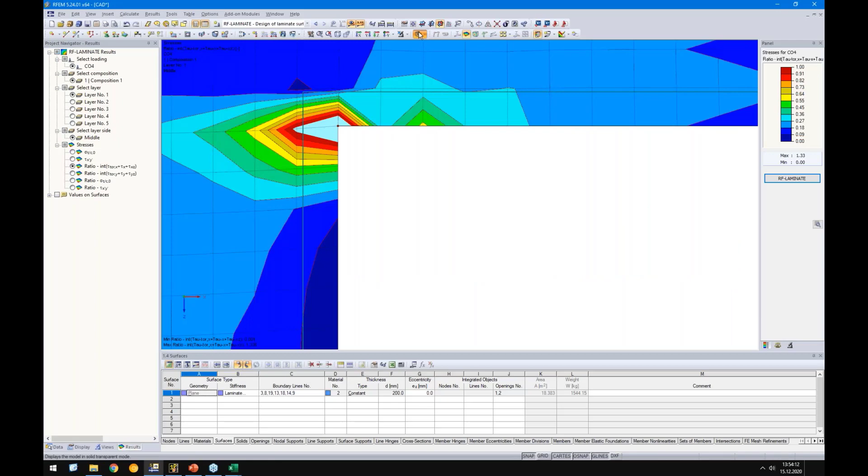So if you are interested in everything that is fine, just go from 0 to 1, for example, and then you see the ratio, the real ratio. Only here in these elements you will not see any ratio, but of course you are not interested in them.

Unfortunately, we have no possibility in timber to distribute any stresses to fix the singularities, or to distribute the stresses with a plastic analysis, so a nonlinear plastic analysis, since we use only a linear elastic material behavior in timber, which is actually common. So there is a way to check it also for timber.

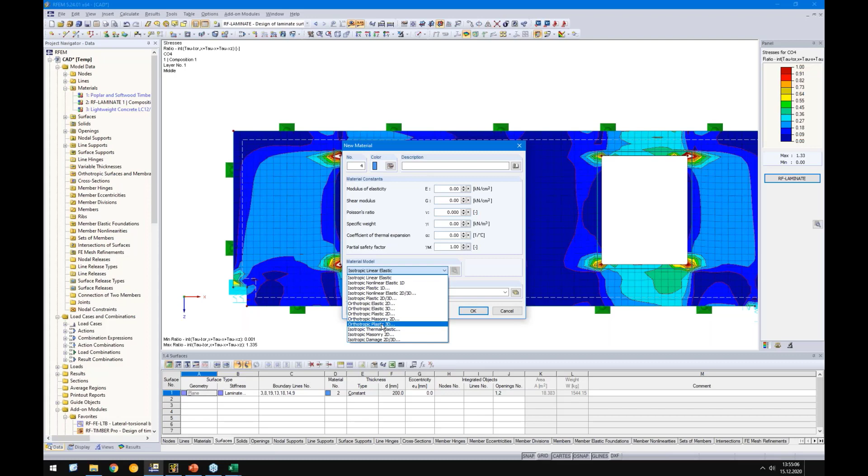We have here a new material model called orthotropic plastic 3D, but this is not the wished design for this simple wall element, because it is much more. So you need to define the strengths, the limits, and of course you need to model the slab or the wall element as a solid element. So each layer needs to be modeled separately. You need to consider modeling the gap because of the glue on narrow sides or no glue on narrow sides. This is not a practical way to do this.

Okay, then let's check. SLS is missing. Okay, but yeah, stability. Okay, so let's check the stability of this wall. So I keep it simple. In this case, I start my add-on module called RF-STABILITY, and let's check maybe where we have the highest normal forces.

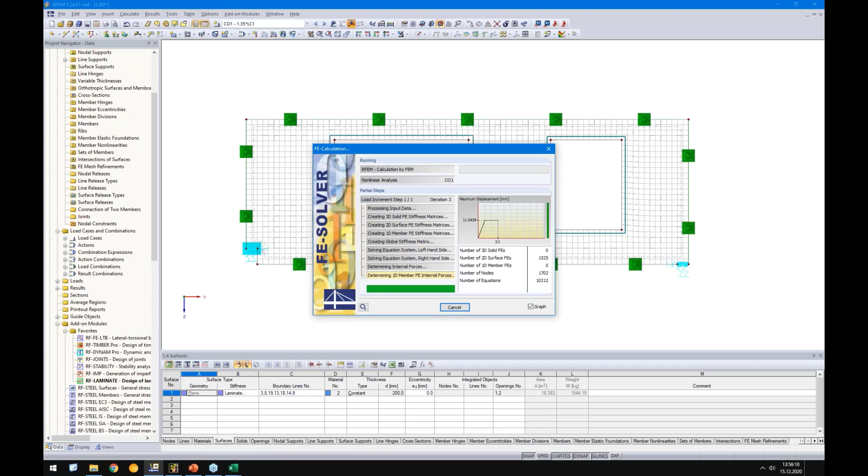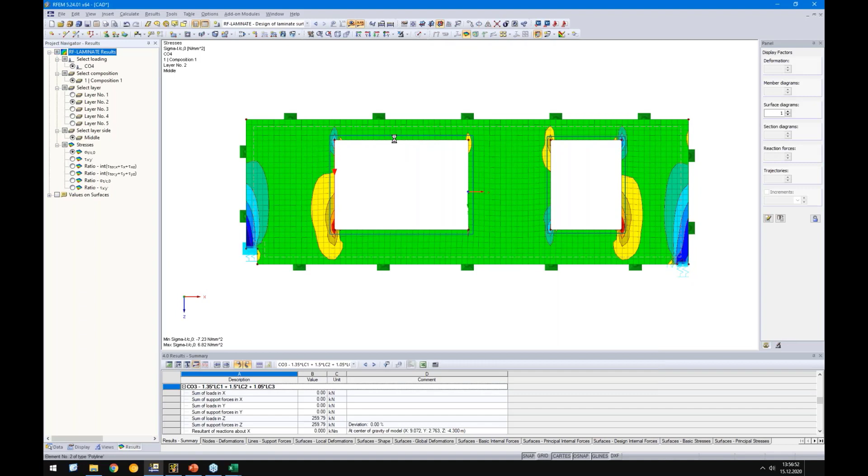So we go here to NX, and let's see. Okay, we have around 580 here from CO1. CO2 is 806, and CO3 is 996. Okay, I guess the other one will not get any higher. So let's use CO3 with the highest normal force in this area, because I believe that the first eigenshape will happen here in this area, which is clear actually.

Okay, let's go back to our stability and select CO3 and simply run the analysis. And the only information I get out is the eigenshape, which is okay. So this is the first eigenshape. Yeah, so it can happen that this bottom chord will buckle out somehow, but of course we need to check the critical load factor. And here you see the critical load factor is nearly 30. That means you need to increase the load by factor 30 to get this failing of the bottom chord.

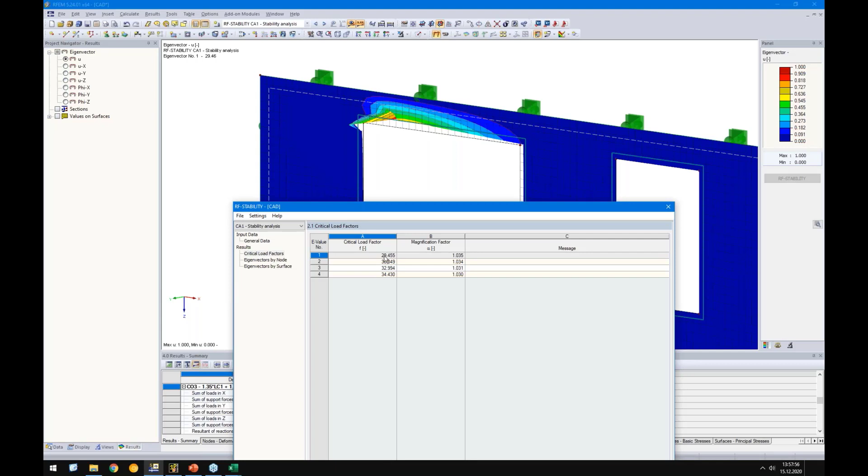So you need to analyze stability, because this is on the unsafe side, because no imperfections are considered and so on. But we have a good feeling with this factor, because it is common to use a factor from 1 to 10. We need to check stability, and everything that is bigger than 10, we can think about neglecting it, and in this case we definitely can neglect it.

So how we deal with stability design for the surface elements I have shown on the website for cross-laminated timber. So simply go to dlubal.com. I need to switch to English, and then go to support and learning, and here knowledge base. I'm not sure if I find the correct keyword. Maybe better to search my name instead. Okay, seems there's some issue with the website. I cannot search for it, but it doesn't matter. You will find this information. If you don't find it, please contact us. I will send you the links afterwards.

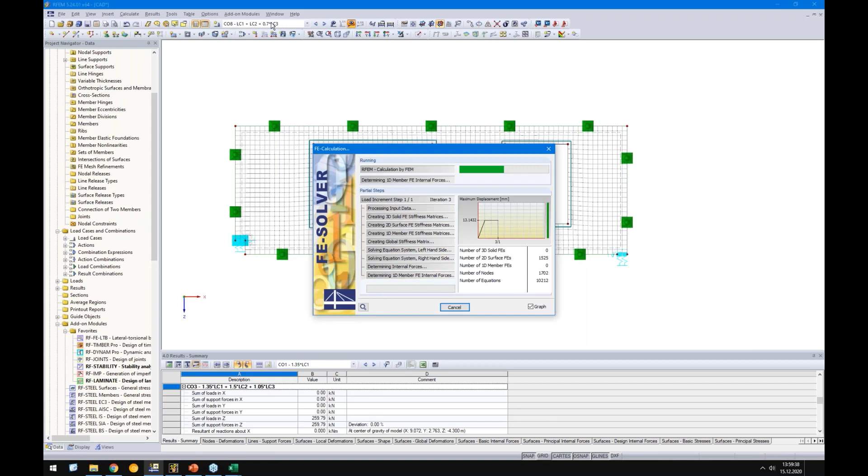Okay, then at the end, there's not much more time, but I will need 5 to 10 minutes more. I will show you this serviceability stuff I mentioned in the presentation. Okay, so let's focus on CO8 only. So CO8, that's the characteristic deformation with snow load, or maybe the other one is more important, because the imposed load was higher than the snow load. Okay, so let's check the deformation of this element.

All right. Okay, so do not wonder that deformation is displayed with factor 67. Therefore it's clear that the deformation is higher here on the left side because this support is weaker than the right support. But as you can see here, this window is already deformed. And of course, when you think about a rectangular window, this rectangular window must fit into the hole after it's deformed. And of course, it should not become any load.

And how we can deal with this, I will show you now. So in this case, of course, you can, for example, analyze or export. You can export this deformed shape to AutoCAD or to a CAD file, to a DXF file, and there you can insert this window and check if it still fits inside. But there's a much smarter way. In this case, I will add some rectangular surfaces. In this case, I will use a rigid surface.

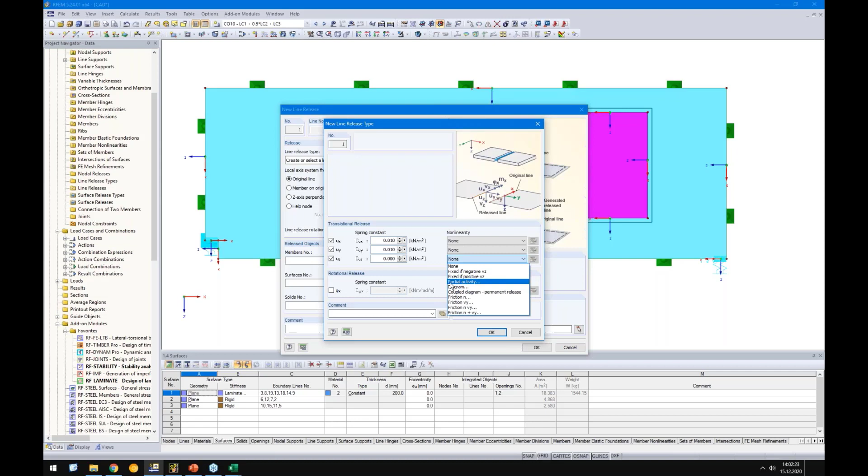And inside here, I can define some slippage or displacement in this case. So let's say 1 centimeter. Of course, you can do it differently for different directions. So in plus and minus, for my example, it's fine with both directions. All right. So I will release surface, I guess it's number 2. And I want to release these lines. And I want to release surface 3 for this one here. Okay, and now let's run the analysis again.

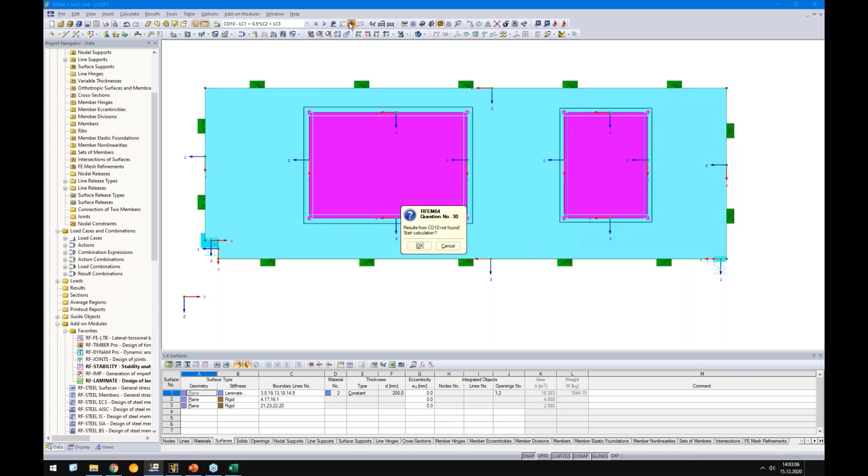Okay, so I didn't remember the deformation before, but that's actually not the aim. Let's check the deformation. So first, it could be a bit confusing because the window is displayed inside the CLT wall, but that's clear. We have modeled the window, the rigid surface, directly to this wall element. So we do not model the gap, we consider it with a line release. And therefore, the distance now between this node and this node must be smaller than 1 centimeter.

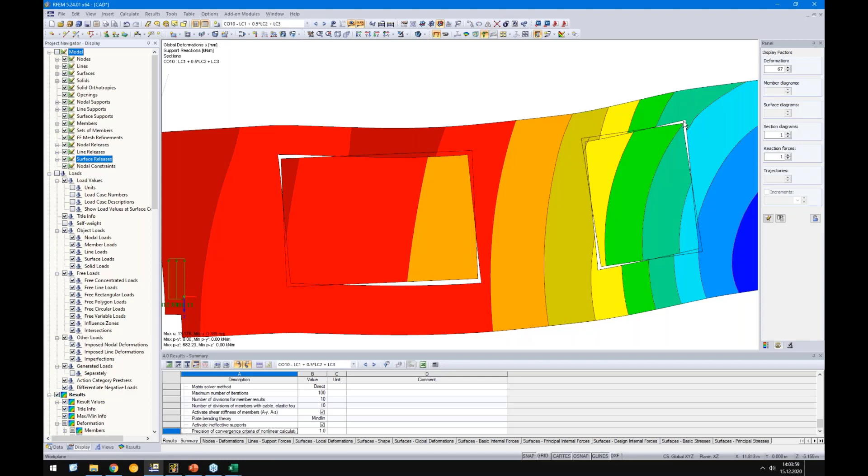You can imagine it's hard to evaluate, especially on bigger models, or especially when you need to check it with some line or some diagrams. You can say, okay, please show me the result diagram, and on this line or on this section, what is the deformation, and compare it and so on. This is actually not a good idea. Much smarter is to use here our results called releases. And here I can activate the releases and I get the release forces for line releases.

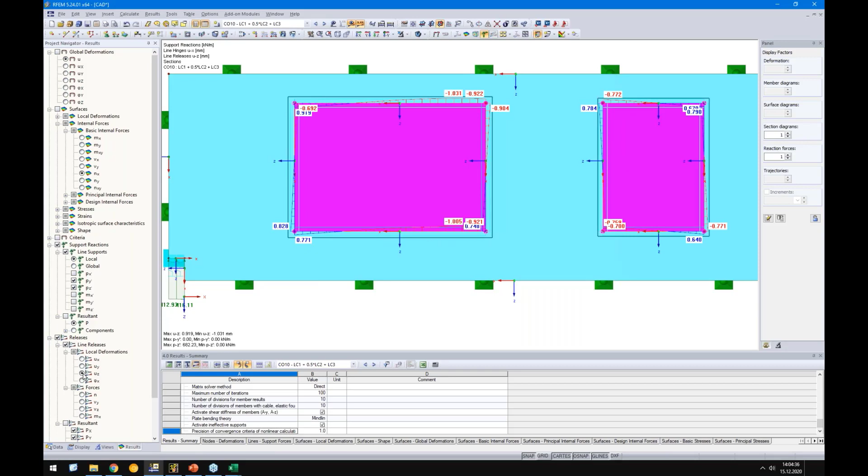So in this case, I get the deformation uz, for example, and you see the deformation. So here the deformation is 1 millimeter. The limit is 1 centimeter, so 10 millimeters. So we are absolutely fine in this example. So this is the way you can check it. You see directly which relative deformation you get. And another option is to check the forces.

So we check vz, and as you can see here, vz is 0. And of course, if some forces would go into the window, into the rigid surface, we would see a force here, and we would see a distribution of the force here. So therefore it is fine. This is the way we can check this stuff here. It was clear that the deformation is not getting so big, but on bigger elements this could be an issue and could be solved. So because of this, you have to think about the gap between the window and the surface, the real window.